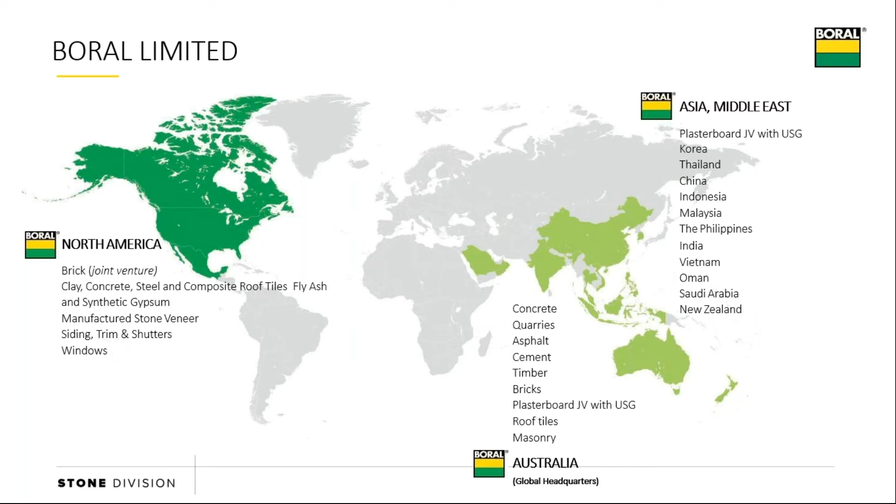By way of introduction, I want to walk through who BORAL is if you're not familiar. BORAL is based in Australia. They do some work in Asia and the Middle East, but in North America, we're primarily a cladding company, doing products like roofing, trim, siding, windows, and obviously brick and stone.

One of the things I've really enjoyed working for BORAL is their stance on sustainability, being responsible in how we manufacture. A lot of our stone plants use closed loop water reclamation systems, some in places that are often in drought situations, so taking little to no water from the local community is a good thing. We've got a brick plant that runs off methane produced from a landfill a mile or two down the road, using that to heat the kiln, reducing the amount of other gases and energy needed to run it. So we're trying to be smart in how we produce the products.

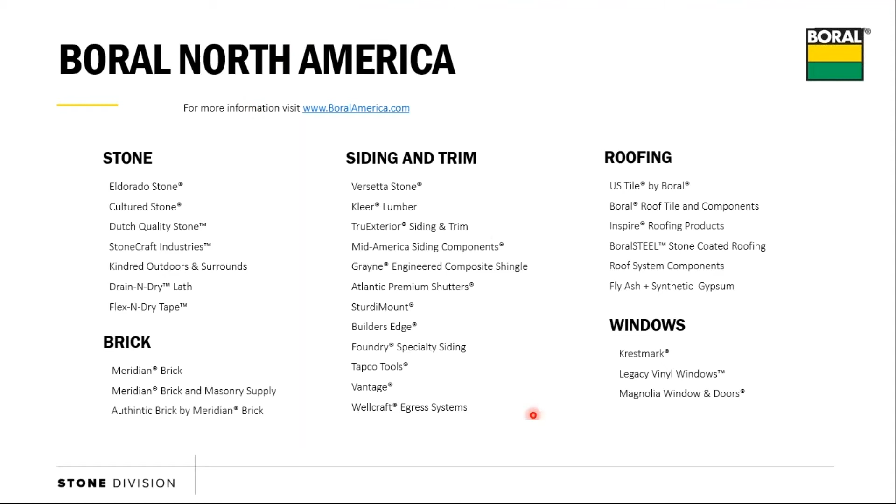BORAL is the leading manufacturer of 5 different stone brands. If you need more information, please follow up with us. Also, a quick list of some of the other siding, roofing, window, and trim products we produce and sell. If you need more information, just go to boralamerica.com and you can find more there.

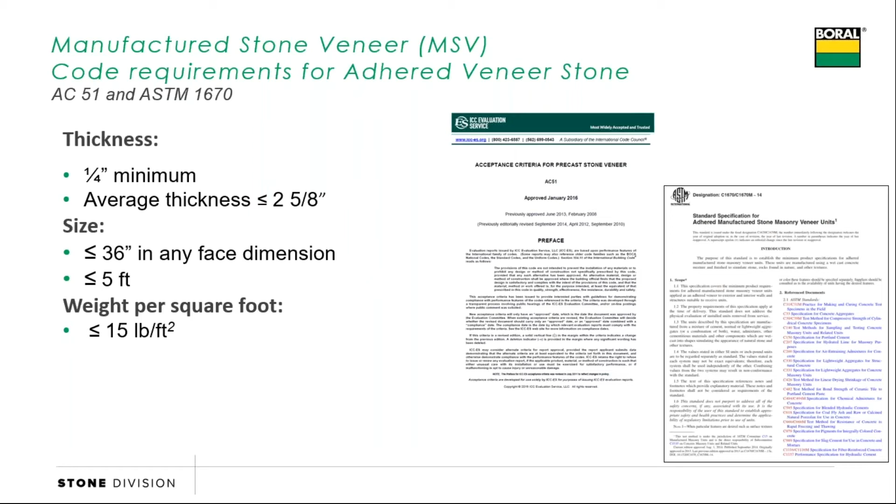As a quick foundation and recap, in our first presentation we spent time talking about the code requirements for the actual units. I think there are 2 we'll focus on again tonight: the average thickness, 2 5/8, and also the weight. The units themselves shouldn't weigh more than 15 pounds per square foot, typically less. Then for the lath and scratch coat setting mortar, we usually add an additional 8 to 10 pounds, so the max would be 25 pounds per square foot for code compliance.

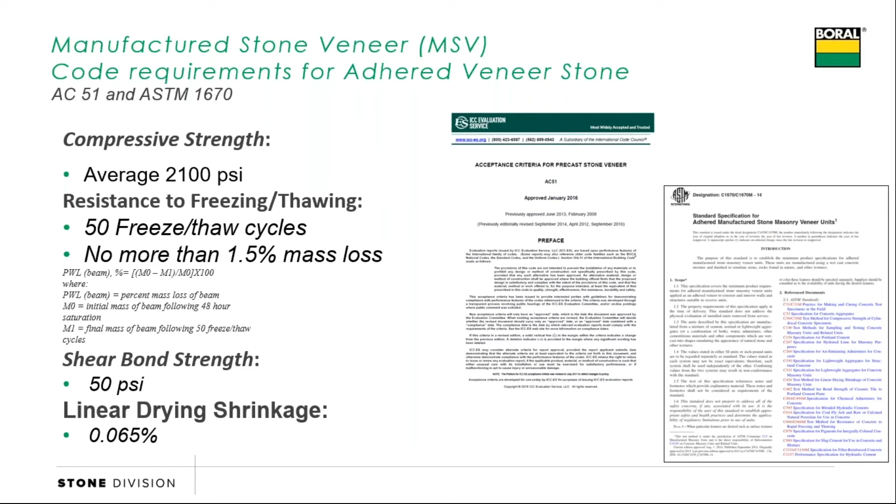There's a lot of testing that should go into any stone that meets those requirements, so again, our recommendation is to make sure you're looking for stones that have done some third-party testing.

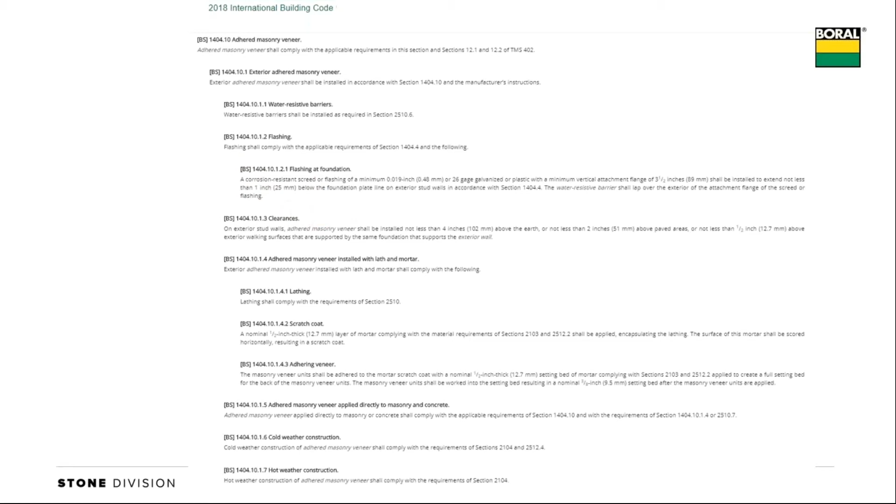We also took a quick look at the building codes and what they say for installation. There's a lot of information about water resistive barriers, flashings, and clearances to grade, and we'll focus tonight more on the flashings and clearances required for an installation. We're going to do most of our work out of the NCMA-MSV installation guide for our stones, using the most current edition that came out in September of 2019.

In our last presentation, we took a few minutes to talk about some of the different ways moisture and vapor move through a wall, whether through HVAC systems, a vent for a fan, or the hot and cold weather we get in summer and winter. It really doesn't matter if you're in the north or the south, energy loss is a concern, and adding insulation to slow that down is part of slowing down leaks in walls. And then obviously, rain events.

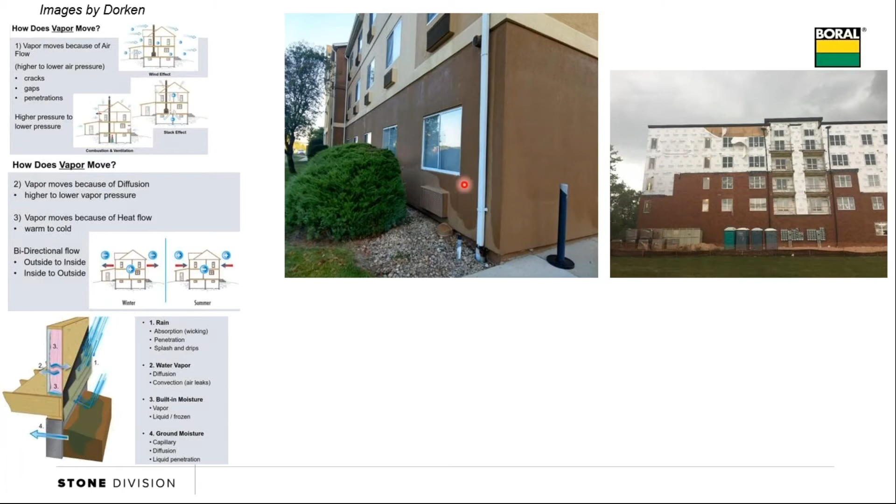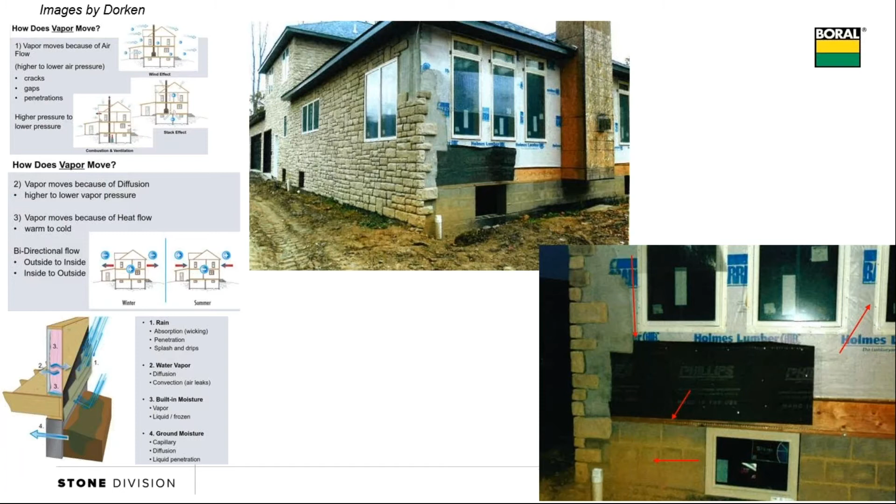We took a look at a picture like this, and again really focused on the area inside the red, where we've got the improper tape on the window. We do have 2 layers of paper, and that's correct, but we did talk about this flashing.

Code requires a piece of flashing between two dissimilar materials or two different types of cladding. The idea is that any water getting behind the cladding above should be directed out over the face of the cladding below, not directed back in behind.

But in the setup we see in this picture, any water traveling down this primary WRB is going to get driven back in behind that black paper. It's not going to jump on top and then jump again to get over that flashing—it's a reverse flashing. They should have either cut the primary WRB to tuck the flashing and paper in, or used a flashing tape on top.

So what does a mistake like that cause? What kind of issues can we see? What we don't see in this picture is about 2 or 3 more stories of stucco or eaves up above.

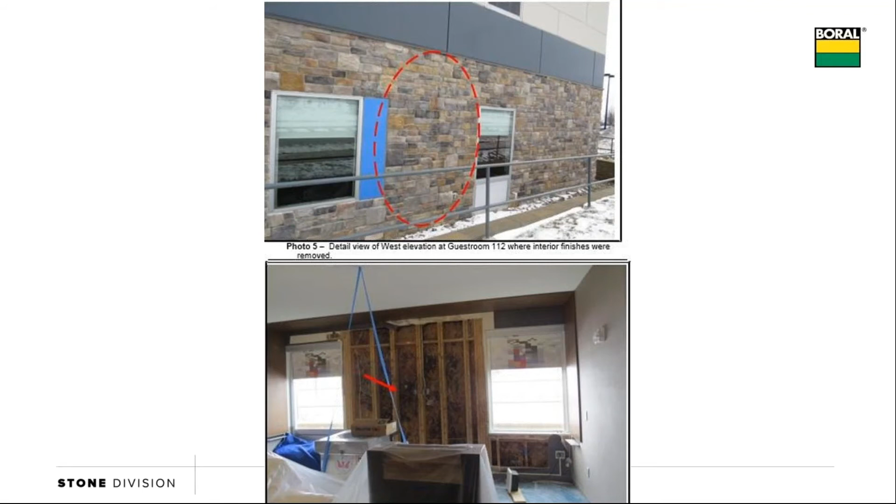In this picture, again, you can't see the 2 or 3 stories up above, but we can see some water sitting in the stone here, and most of it looks pretty dry. That would be an area of concern.

As they began to tear off the stone, they found a lot of damage behind it, and what they found, again, was reverse flashing. The flashing was on top of the paper, directing water from the 2 or 3 floors above back in behind the stone rather than dumping it out.

So how do we prevent against some of these issues? What are some things we should be looking for? What are some of the details we're going to use? That's what we want to cover tonight.

The first thing we would recommend is to require a mock panel. It really doesn't matter if it's a residential or commercial job. If you've got a residential project with maybe a new design or new contractors, it's not a bad idea to get them out around the house and work through the sequencing.

On a commercial job, it's not uncommon to have some type of mock panel, but having one this extensive is important—with windows, penetrations, and all the transitions between dissimilar materials. It gives us a chance to make sure the right products are used in the right places, and to talk through contractor sequencing: who goes first to put the flashing in, who comes in second, so everybody knows what to look for.

We can check for proper flashing placement and talk about those material transitions—is there going to be a soft joint between that brick and stone? It also helps us handle any aesthetic disagreements.

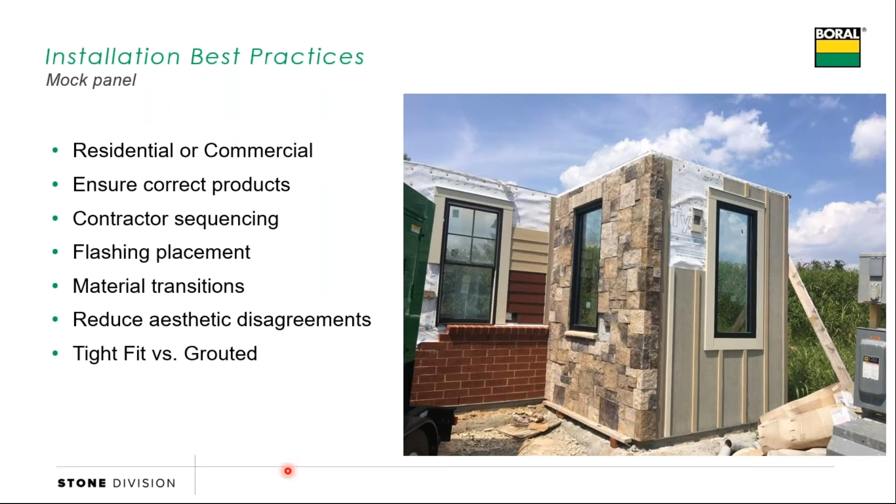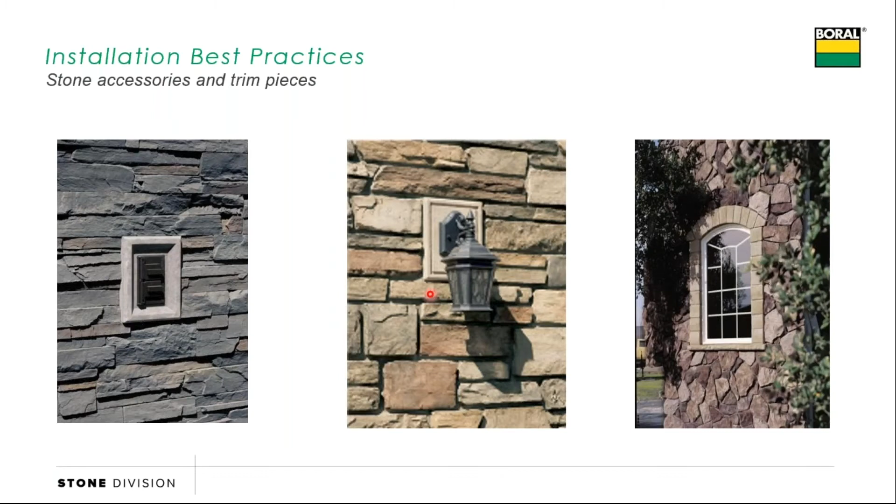Finally, make sure everybody's happy with their tight-fit look or grouted install, depending on what they've selected. If there are penetrations coming through the wall, it's a great opportunity to show what those trim pieces will look like, and also a chance to talk about mortar colors.

These are popular—if you've got a lighter colored stone and want a lighter mortar, it's good for the owner, architect, and designer to see what that colored mortar looks like and make sure they like it before it goes on the completed project. It's a lot harder to change once it's on a finished job.

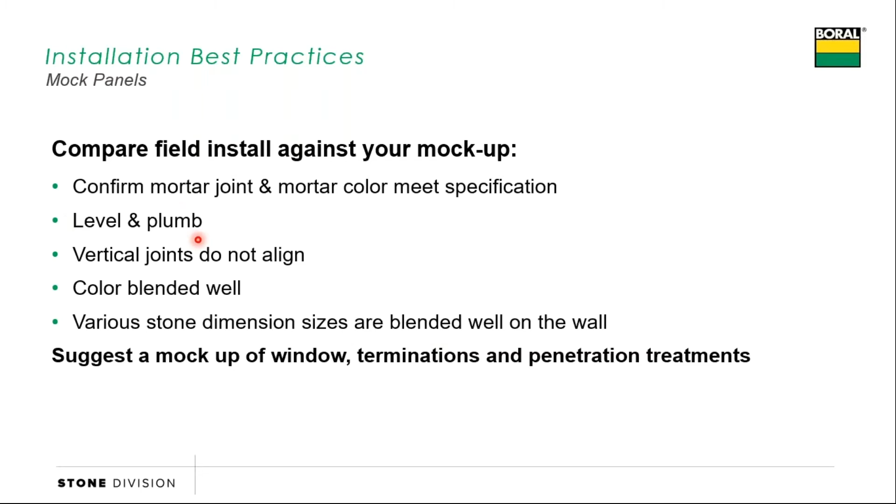It's a good chance to check the level and plumb of the install and make sure we're blending colors well. This is a nice smaller mock panel, but it's got all the different claddings and all our different transitions on here.

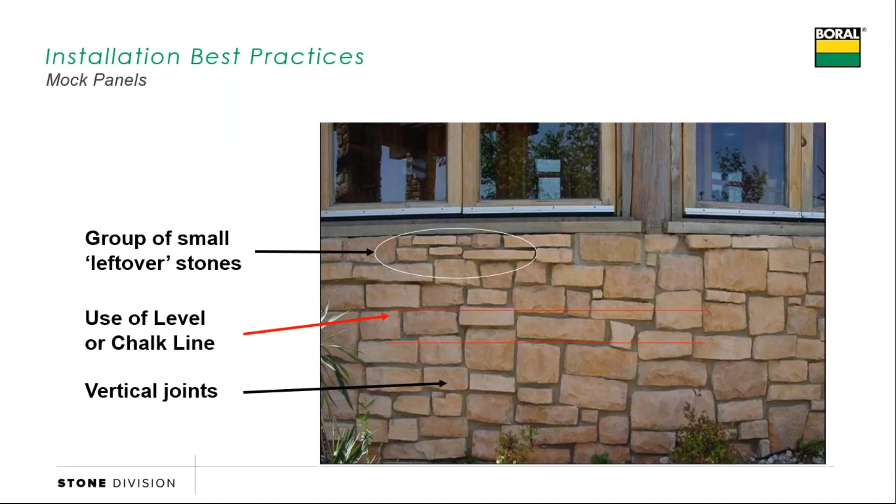If we've agreed that this is what our stone install should look like—and I know this is a different profile, but it proves the point—if we end up on an actual job site and see all the little stones got used up in one spot, we've got really long head joints, and we didn't chalk lines because we can see how we're tailing off and running downhill. If this was our mock panel, the control we used for the installation, and this is what went up on the job, I don't think we'd have nearly the arguments we have today. So it's important to have those mock panels.

The other thing a mock panel gives us a chance to do is some testing on it, making sure we've got flashings in the right place. In this case, we're going to look at this transition between the stone and the stucco.

If all we do is install our second layer of paper where the stone's going to go, put our metal lath on, put our stone on, in about 6 weeks, maybe 6 months, right in between the stone and the stucco, they're going to move at different rates. And that's going to open up a crack, typically big enough for water to run into. They call that bulk water intrusion.

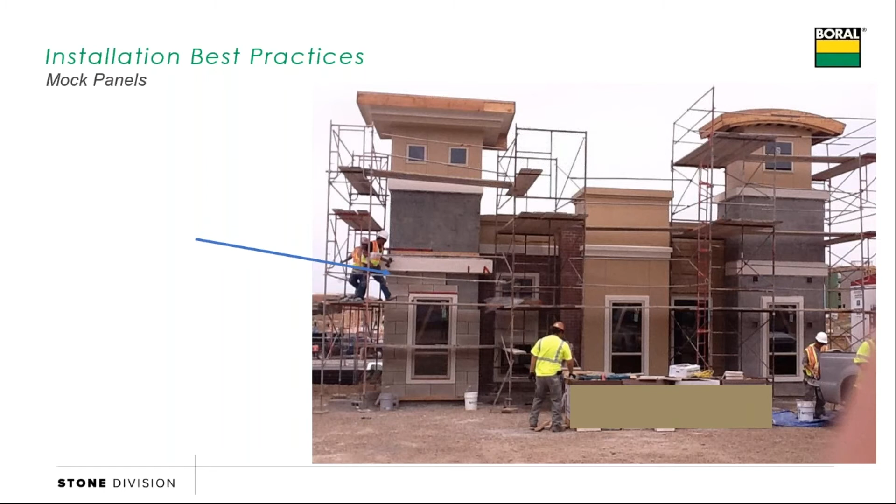Now, if water hits the middle of a stone system, typically it soaks into the stone and the scratch coat, and any that makes it through the paper will travel down and exit out. But if we've got a hairline crack big enough for bulk water to get into, that's where we see wall systems that get oversaturated, and over time water begins to work on the sheathing and cause damage there. So there should be flashing in between those two per code.

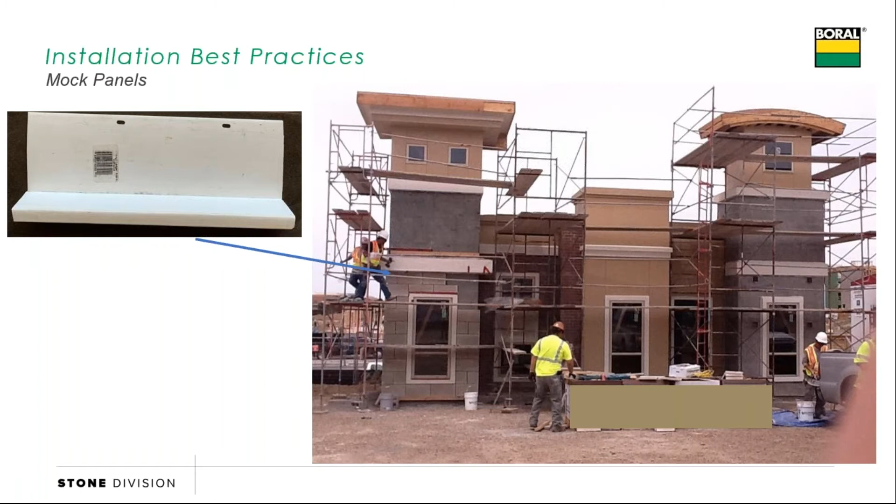If we've done a proper mock panel, we would know who was responsible for that flashing piece—is it the stonemason, is it the stucco contractor? And when the other trade shows up to do their work, if they don't see that flashing there, they can notify the GC, the designer, or the owner and get it corrected before they install. That way we don't have those issues in the future.

Now, in that NCMA guide, there are quite a few different details, over 40 of them. We'd recommend getting a copy of that guide. We're not going to go through all 40 right now—just some of the more popular ones, the ones we get the most questions on. But these are available both in PDF and CAD format.

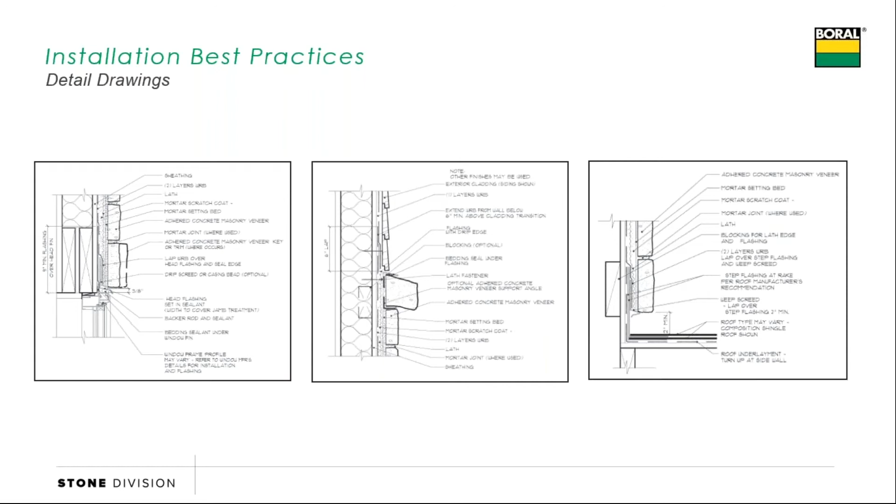Probably the most common question we get is clearance to grade. What we're seeing here is our 2 layers of paper and our metal lath and scratch coat, all terminating on top of a weep screed. That weep screed is going to be about an inch, at least an inch below the sill plate. It serves 2 purposes: it's a drainage spot for our stone system, and it's also that capillary break to keep water from wicking up into the bottom of the wall system.

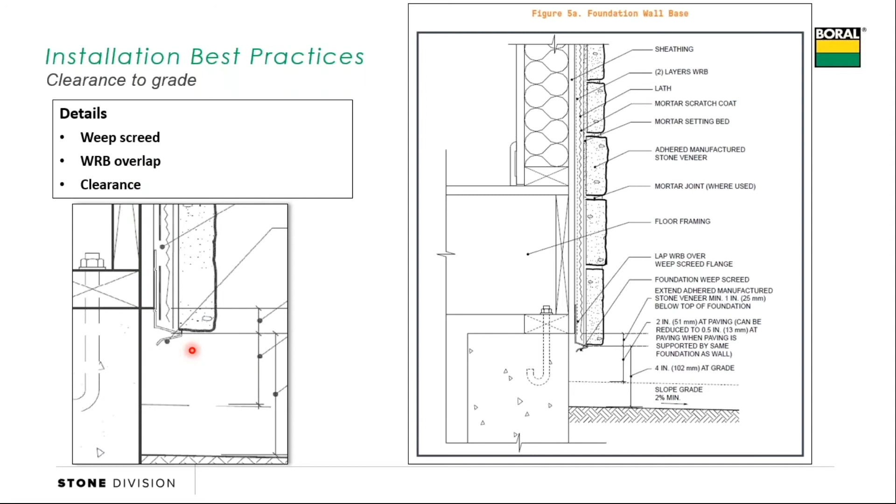That clearance allows for termite inspections and keeps water from wicking up. Code says we need to be 4 inches away from grade, 2 inches from a paved surface, and ½ an inch if that paved surface is part of the foundation that the wall is on. Think of a porch—if that's part of the foundation, it's really not going to move at all because it's part of the foundation the home or structure is on.

The reason we look for that is it's a trade-off. We're using a lightweight concrete that wicks water, so we don't want it to come in contact with grade—we want that open exit point for water. If we put it in constant contact with grade, we've got potential for efflorescence and staining. That gap gives us a place for termite inspection, and to be honest, it's a requirement in most areas for code. Manufactured stone is not different from other cladding products.

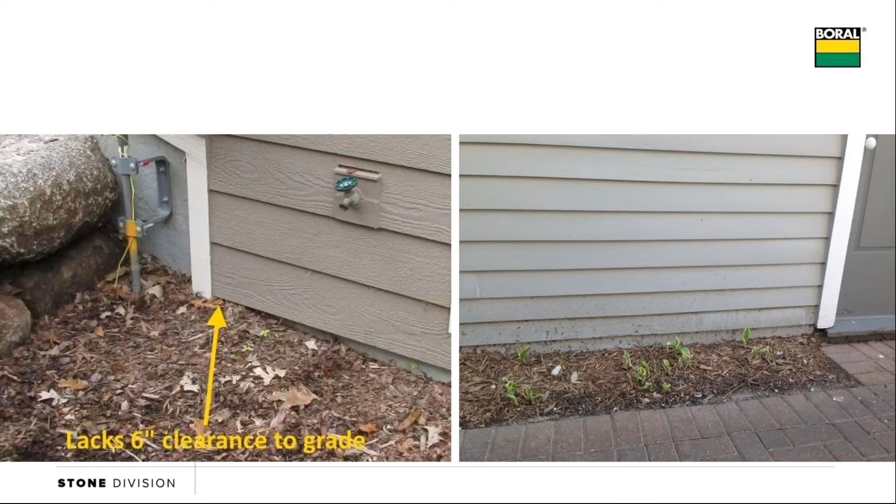If you look at wood siding, vinyl siding, cement board siding, they have clearance requirements also. And if you look close enough at this wood siding, you can see it's beginning to soak up water and it's beginning to damage the stone or the wood siding there. Brick is an amazing, beautiful, and hard product, but if exposed to enough de-icing salts, that can begin to cause damage even in the brick and the grout joints that are there.

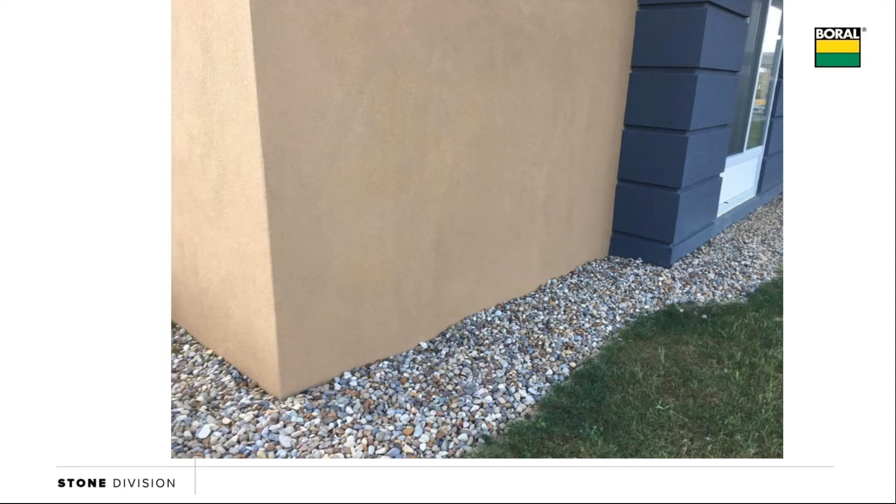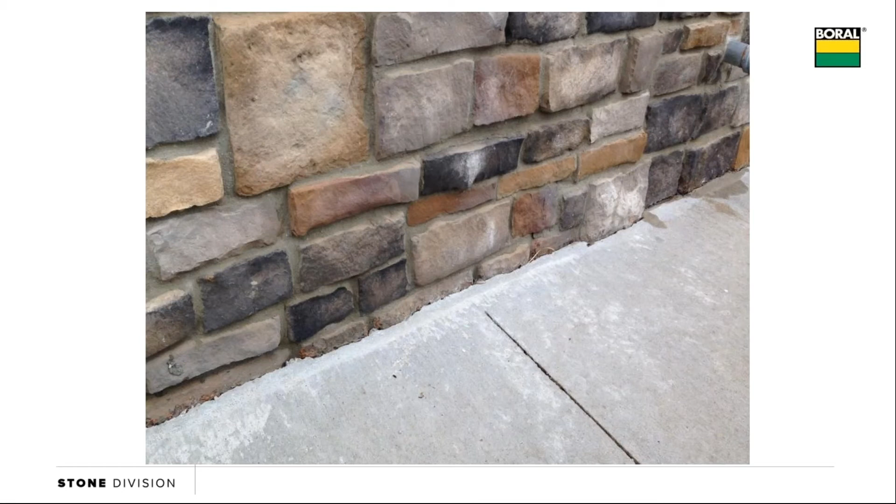This is an EIFS system. EIFS should have a 6-inch clearance at least, and it was buried down into grade. Now, as that system tries to drain, it can't, and that can cause some damage. And then obviously with a sidewalk that's poured right onto a manufactured stone, as it heaves a little bit, it's causing damage.

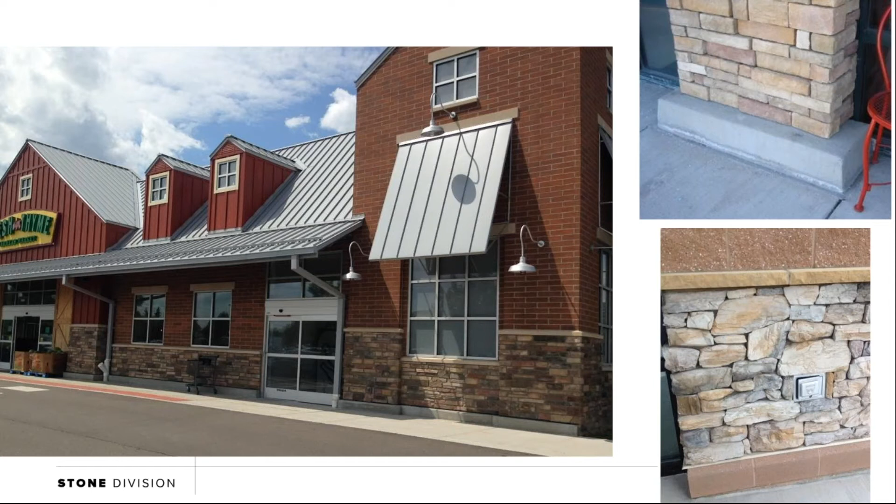So some different ways that we have seen that folks are trying to handle that clearance. In some commercial jobs, they're pouring or adding bumpers that are part of the foundation. That way by code, they're allowed to come down to within 1/2 an inch, and now it looks like that stone is actually sitting or supported rather than floating up above a sidewalk. An application like this could work in a commercial or a residential application.

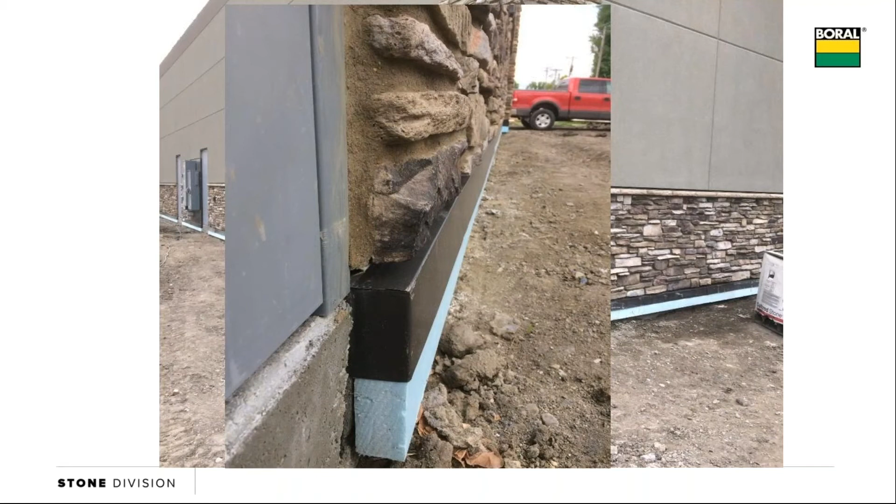They've bent a coil stock that might either be similar to the stone or maybe to the mulch out over top of a piece of 2-inch rigid foam, but it's tucked back in behind the 2 layers of WRB and weep screed so that any water that travels down gets out and doesn't get driven back in behind. They do that the whole way across the stone system. Now, when they come in to backfill, they still need to stay down that 4 inches to meet the requirement for code. But now that stone looks like it's supported, it's a much cleaner, much nicer finish.

Now, anytime we transition from foundation to framing, code says that we need to handle this transition somehow. We've got 2 different options. The first one is to bring our 2 layers of paper, our metal lath, terminate them on top of some flashing. And then from here on down below, we can either apply directly to clean masonry, or we can shoot lath on if it's not clean, to get a better bondable surface.

And now we can come down to within 2 inches to grade, this pop-up, 2 inches to grade, and 1/2 inch to a paved surface, as long as we've handled the fact that that paved surface is not going to heave substantially and cause damage. But what we're seeing in this detail is this flashing piece that needs to have a 3.5 inch attachment flange, has a sloped bend to it, a bead of sealant underneath. This is required. If we follow the lines from the weep screed up, you see that the weep screed or a drip screed or a casing bead would be optional.

The reason is we have created a drainage point for the system with this flashing, and we've created the capillary break. That weep screed is kind of redundant. It's doing the same thing, but it's now dumping the water out over the face of the stone. It would dump the water right on the stone below it, which is not good. So we have to have the flashing. The casing bead would be optional.

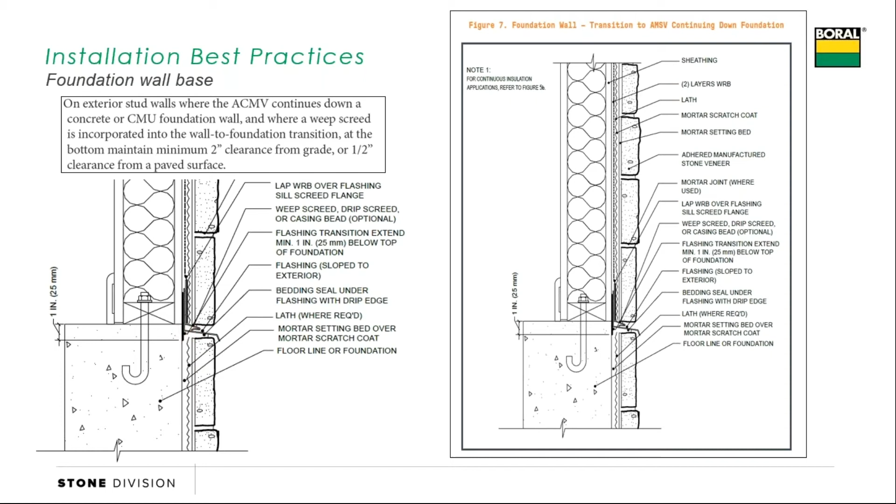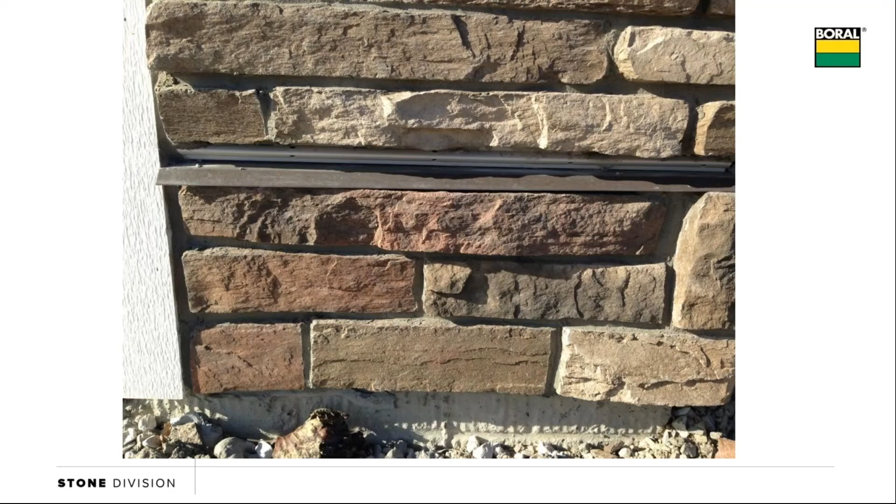It would look a little like this. You could remove that casing bead that's there, or I'm sorry, the weep screed that's there. You could bring that stone down a little bit further, and if you can get that metal to kind of be a similar color to the stone, it's not that noticeable. And again, we can come down within 2 inches to grade now, or 1/2 inch to that paved surface.

If you don't want to see that running across at the sill plate, our other option is to put some flashing at our transition point between the foundation and the wood, and then carry our 2 layers of paper and our metal lath down to the weep screed, but it needs to stay 4 inches from grade, 2 inches from a paved surface, because we don't want water wicking its way up and having any chance to get to our framing.

Now, in both of the details, I didn't highlight it in the first one, I should have, but in the second one, we can see this flashing before the 2 layers of paper. The reason we see that on there is this is a very fairly vulnerable point in the construction. If we only bring our weep screed an inch or so below this sill plate and have our paper on top of it, water could wick up and get back in behind here fairly easily.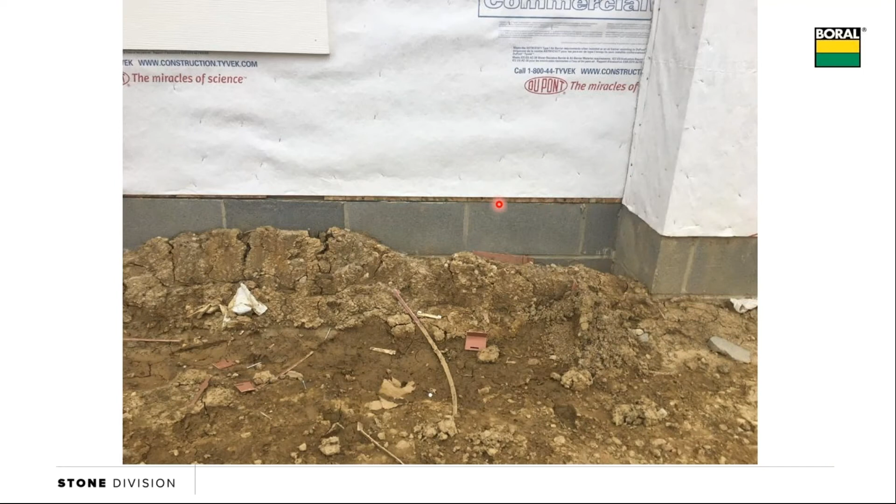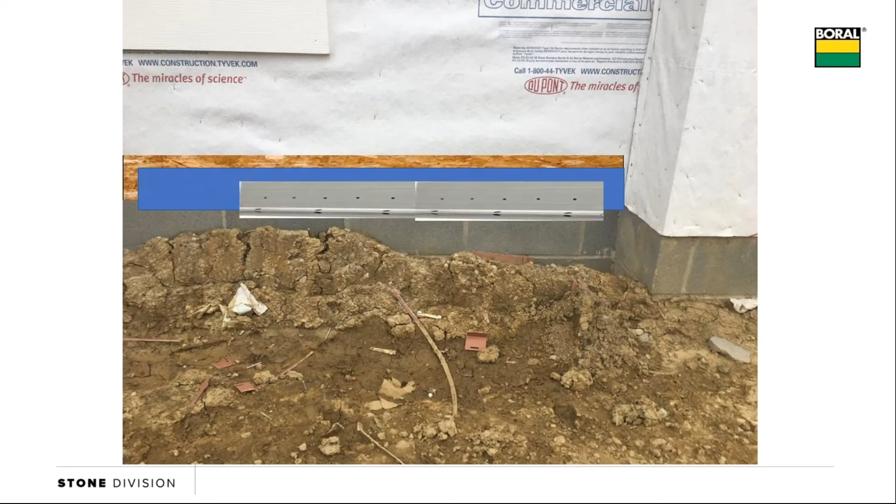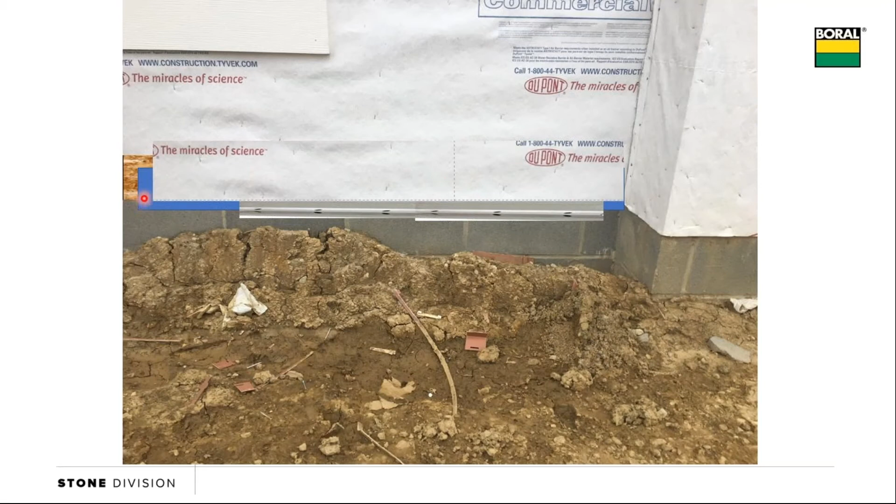So what we're seeing in that detail is that primary WRB gets flipped back up. We're going to come in to expose the wood there, come in with some flashing, some metal or some peel and stick there. Next, we would install our weep screed and then bring our primary WRB back down over top of it, and then our secondary layer and our metal lath. That way we know that this transition point is properly protected.

Stone coming up in a wainscot application, or stone coming up to a first floor, and then transitioning to a different cladding, often using a water table sill as that transition point. This is a pretty common application.

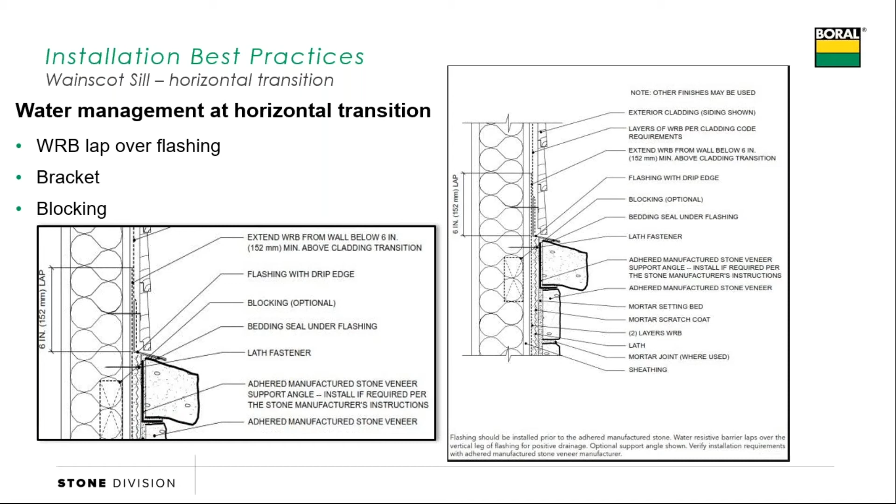Now we recommend 2 anchors per water table sill. You would need to put blocking back in behind in order to anchor those properly. If that blocking is not present, then you're only going to be able to anchor those into framing, which means they may only get 1 of those anchors per water table sill.

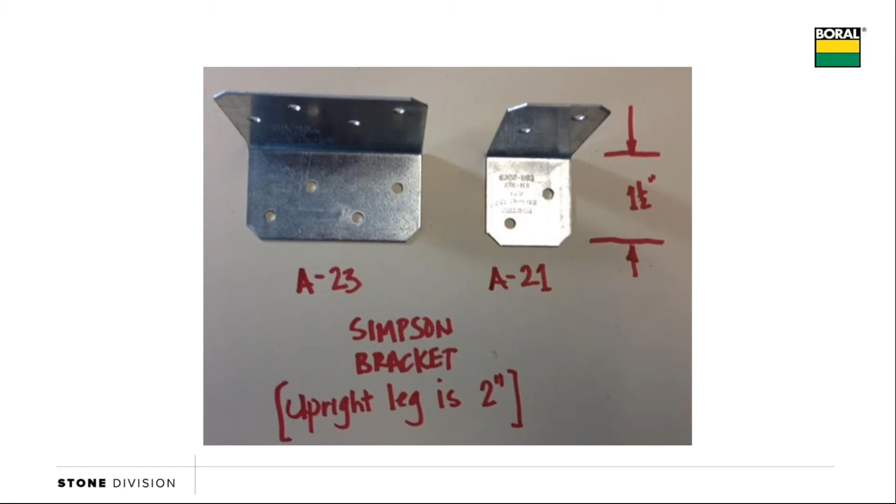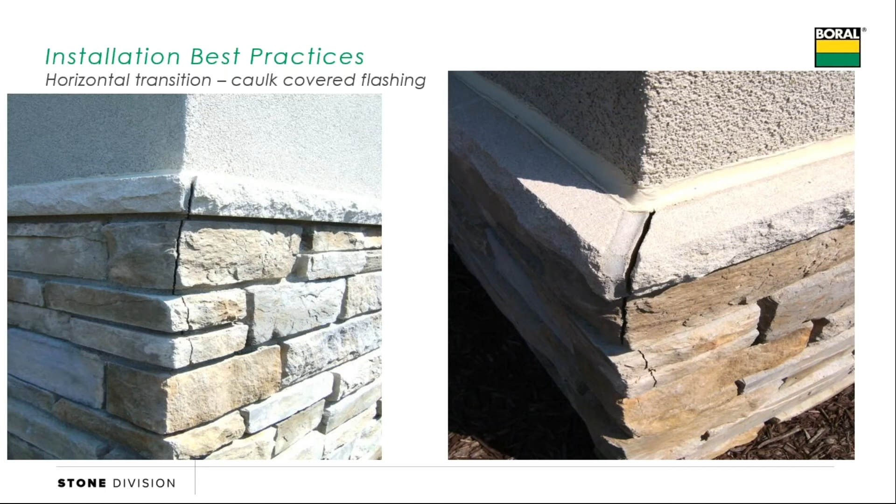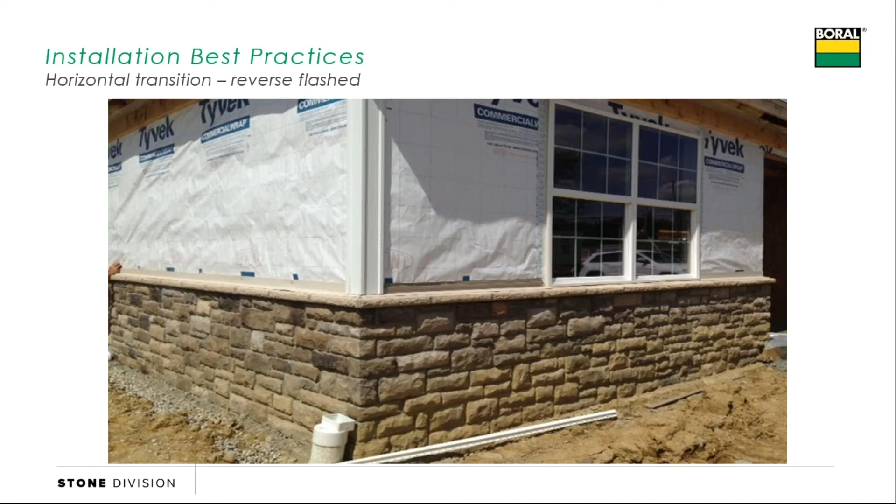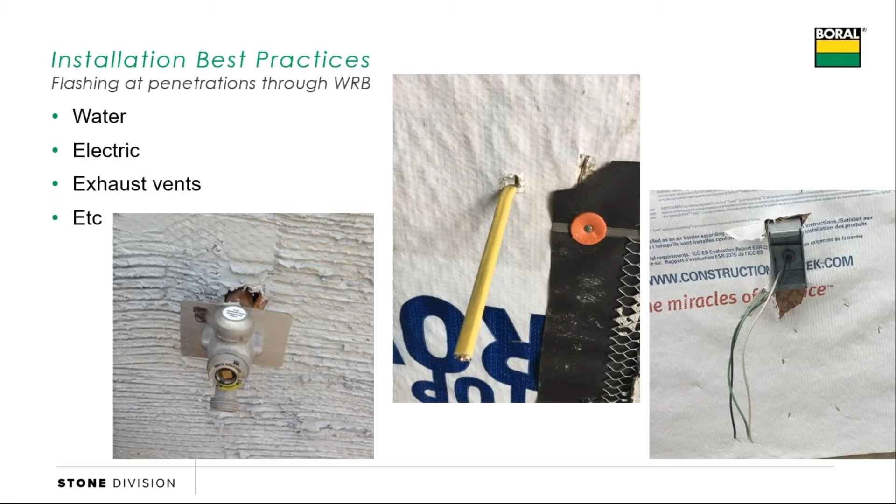Let's talk about penetrations that are coming through the wall, whether it's for a gas line, a dryer vent, or electric, as you see in here. We need to make sure that those have been properly handled. We want them to be air and water tight. There are a lot of great details in our installation guide. I would also suggest that whoever the primary WRB manufacturer is, they likely will have some really great details on how to handle those penetrations coming through the wall.

But I would suggest that holes like these coming through our primary WRBs, if not addressed, are more dangerous today than they were 20, 30 years ago. If all we do is poke a hole in our black paper and stick that through the electric, and then cut our metal lath out around the outside and install our stone over top of it, we've created a spot where moisture and bugs could potentially get into that wall.

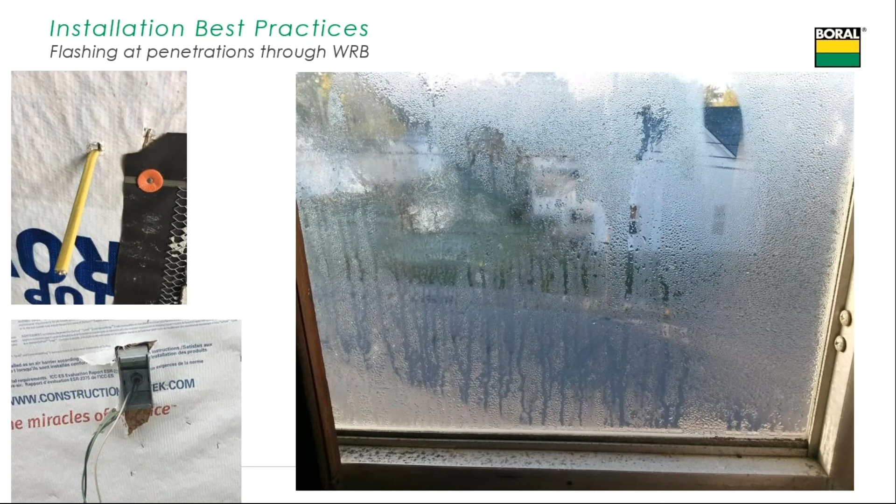I would suggest that that is not how we're building homes today. We are sealing up as many holes as possible. Often homes and buildings are performing blower door tests to make sure that they meet a requirement. If they're finding leaks, they're going through and sealing those up.

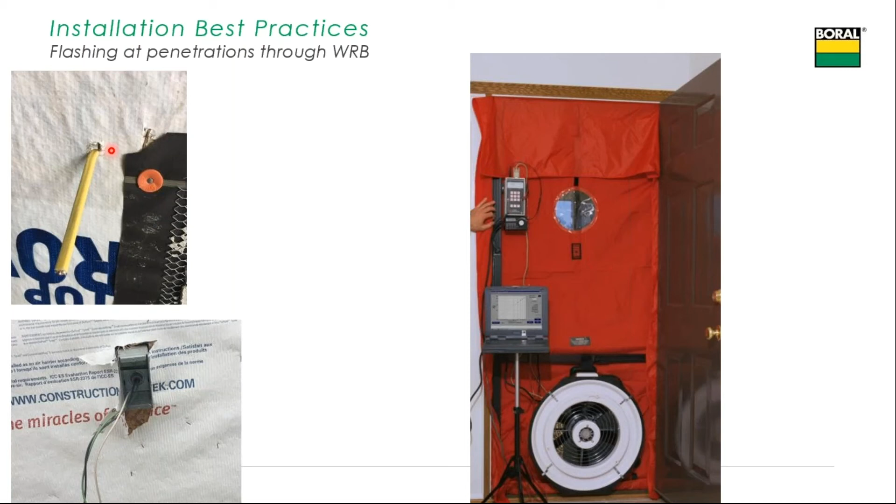In a home like that, a hole that has not been handled properly becomes a place where water can get in. The folks over at Construction Instruction have a wonderful app with some great videos, and I took a screenshot of one because it tells the story better than I can, where some warm, moist air finds its way into a wall cavity through something as small as an electric socket. If it warms up that wall cavity enough and finds an exit point that has not been sealed and flashed properly, we begin to see condensation.

That cold, dry air meets that warm, moist air. And if water is dripping right underneath this electric line over 3 years, 5 years, 7 years, maybe less, eventually that's going to begin to rot out that wall cavity.

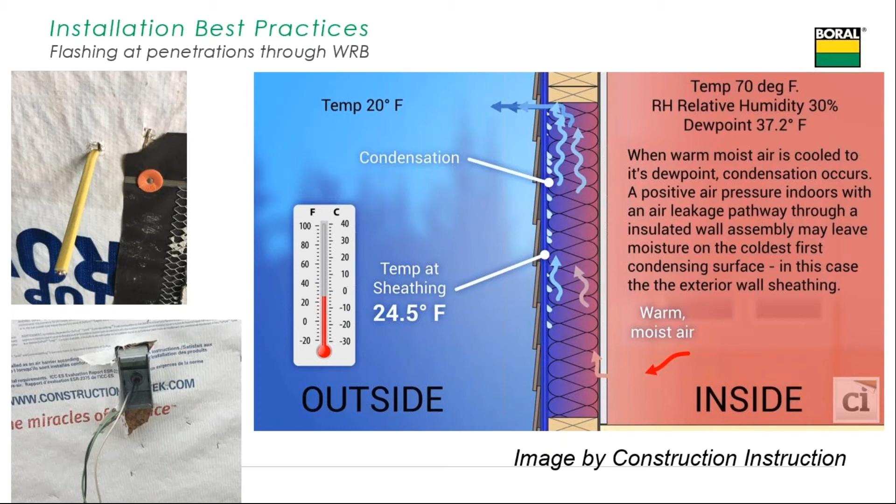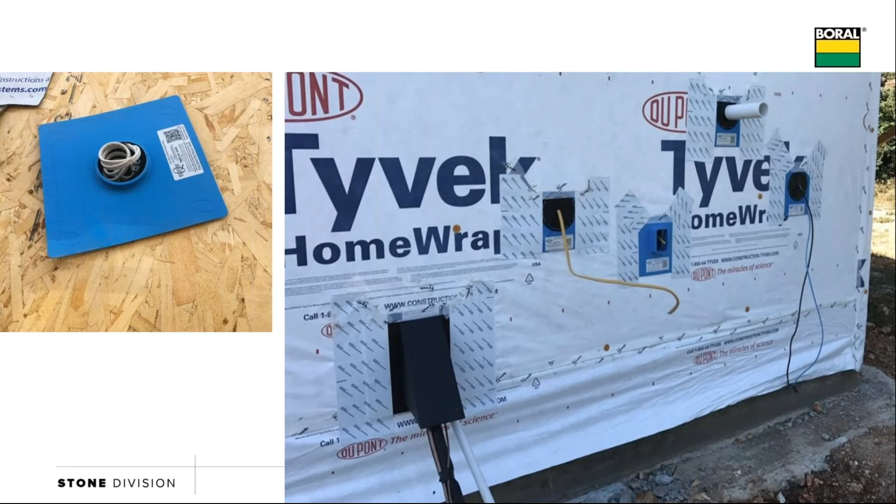So it's important that when we approach a project, all those penetrations have been handled properly. I would suggest to the contractors, if you do not see those penetrations handled properly, if it's your job, you need to fix them. If it's not your job, you need to go get somebody and have them fix it before you install over it. You do not want to accept a wall that is not properly prepared.

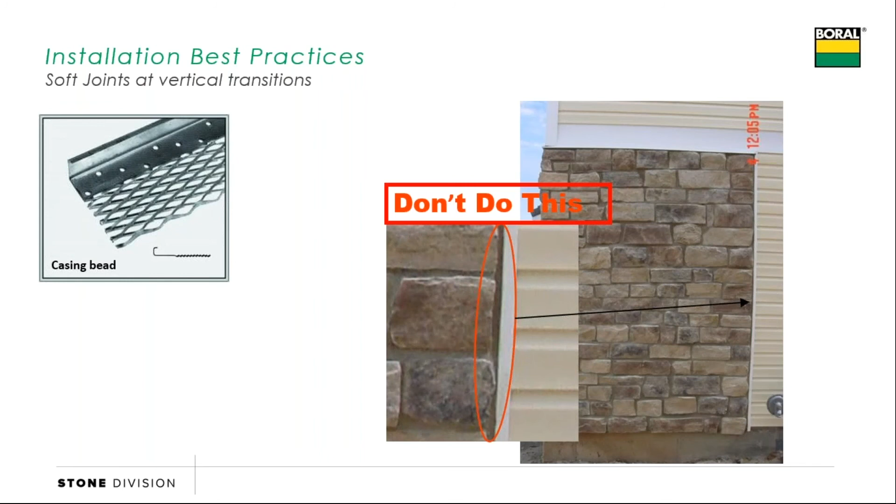Let's talk about soft joints a little bit. Chris covered this a few weeks ago. If you didn't hear it, go back and grab that one. It's worth the listen.

But anytime we transition between dissimilar materials, we talked about the flashing that's required for those horizontal transitions. But the same thing goes, we need to handle these vertical transitions properly. That J channel is going to expand and contract at a much higher rate than stone and grout does. Same thing goes if that were brick or cement board or vinyl siding or wood siding. They move at different rates.

So what we need to do is have a soft joint in between to protect water from getting in. Again, if that J channel expands and contracts a lot, we're going to get a crack probably big enough to slide your credit card through for bulk water to begin to penetrate into that wall system. And if it works sideways, it can begin to cause some damage.

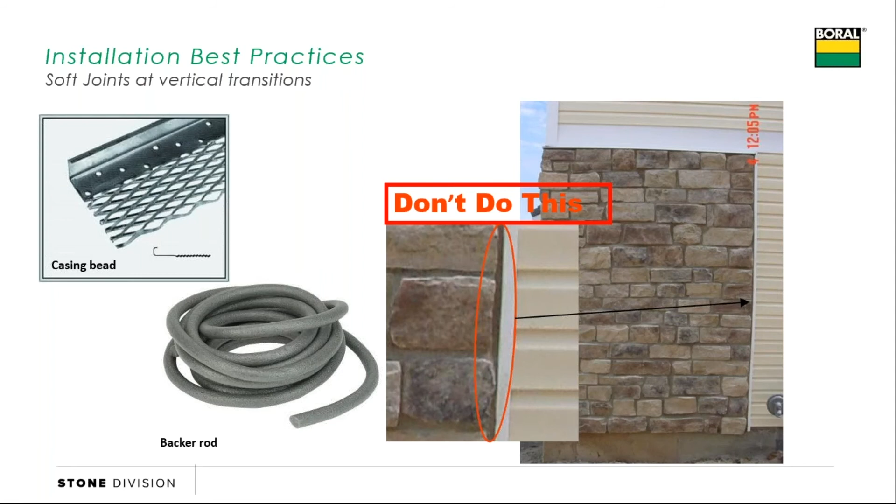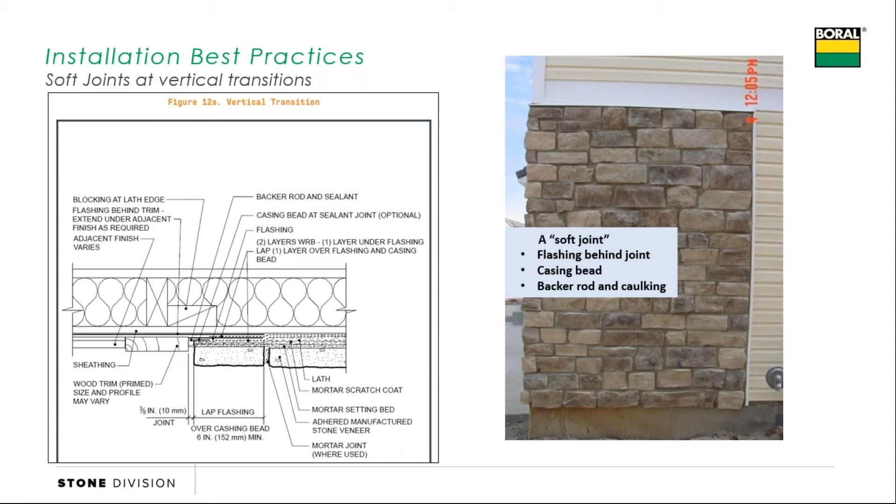So what should that soft joint look like? Well, typically it's about a 3/8 gap, and then it's typically filled with some type of backer rod and sealant. That allows those two dissimilar materials to expand and contract at different rates without damaging each other, and also prevents that bulk water intrusion. Here's a picture of a soft joint in between two dissimilar materials.

That's great to see, but you can see that stuff begins to pick up some dirt and just isn't really a good match for those materials. We do have a product called Flex and Dry tape. This would be a soft joint replacement. The nice thing is you don't need any caulk anymore. It installs faster and will last longer than the sealant that you're using.

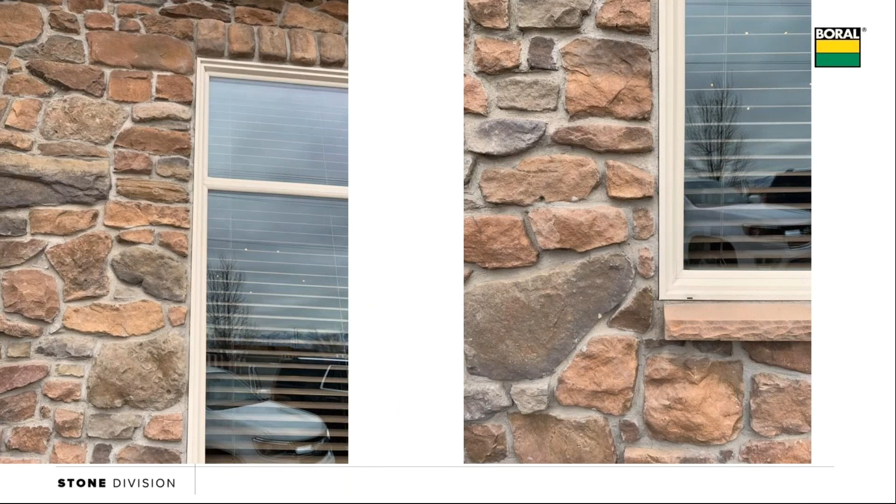Another place that we should be concerned with that differential movement is between windows and stone. If you look close enough, you can see the hairline crack. It's worked its way around all four sides of this window. This is a new building. No one has taken occupancy yet, and we're already seeing those cracks begin to open up.

What's happening is that window is expanding and contracting. The grout and the stone are not. Unfortunately, with windows, when they expand and contract, and if they try to expand out and can't because they're hitting brick, stone, siding, something like that, they begin to cause damage, and a lot of times that moves internal. It might be windows that don't open well, or worse yet, the seals that are inside of a window that are meant to catch water and direct them back out can crack and allow water to begin to penetrate inside of that wall system below the window.

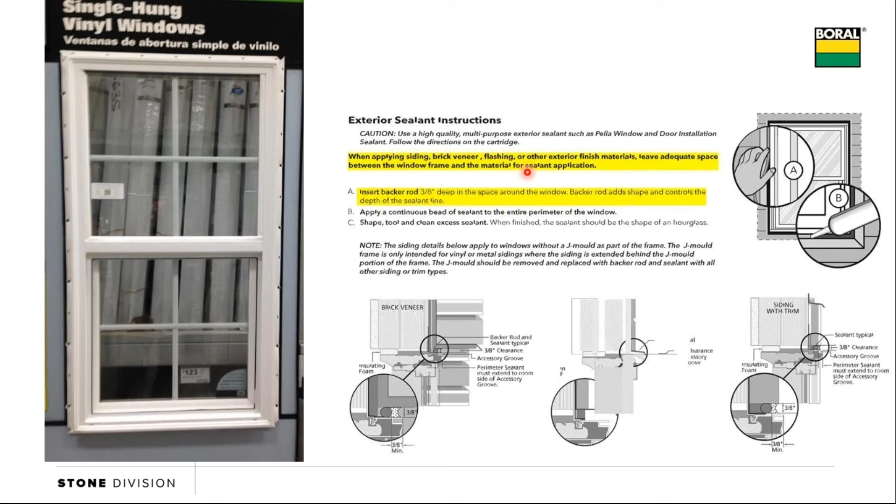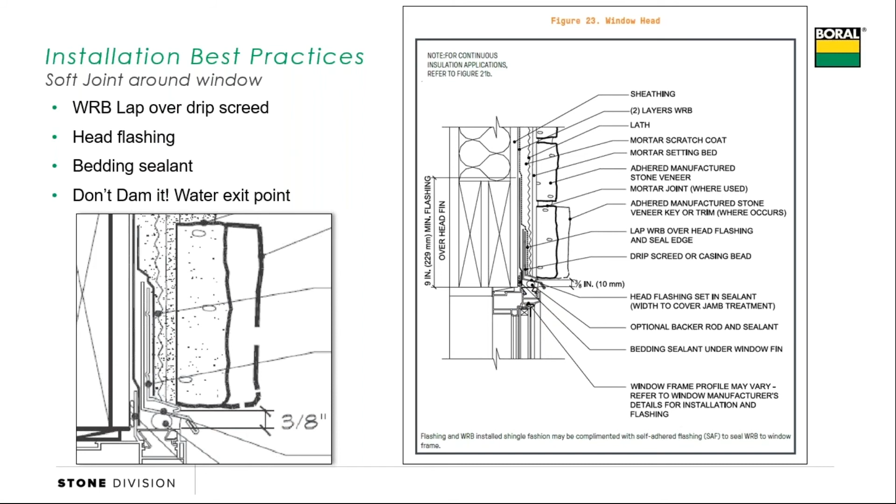If you take a look through most window manufacturer installation instructions, they're going to ask for that soft joint between siding or brick to have flashing back in behind, all of that to protect that window. So what is that going to look like for stone? Well, we want to see a soft joint underneath a piece of head flashing, and then our paper and lath over top. We want to take any water that is traveling down that wall above the window and direct it out over the face so that it's not dropping on top of the window. We need that 3/8 gap around the sides.

And the same thing goes for underneath. Now, what it's going to look like with a stone job is something similar to these pictures. We've got our gap that we can come back through and fill with backer rod and sealant.

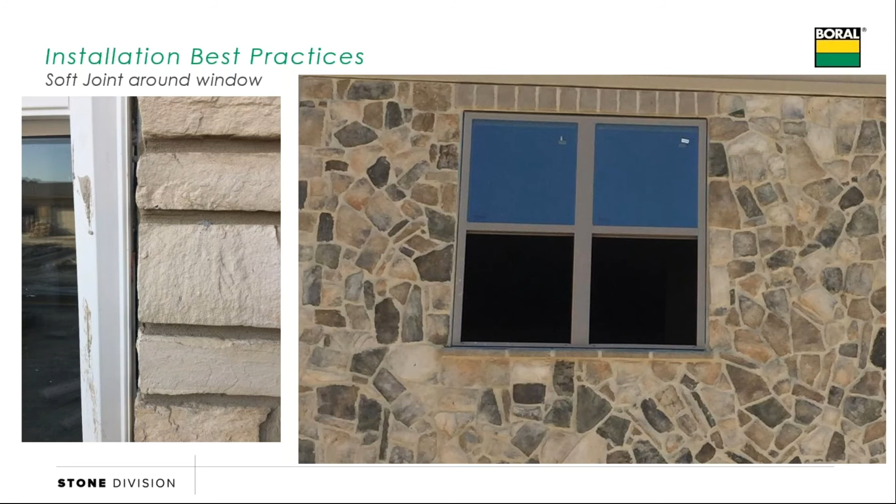I would suggest that probably from the sidewalk in, to be honest, you will see the gap in between those two. As you get back from the sidewalk out to the street, it really becomes very hard to see. But the important thing is that by creating that soft joint on all four sides of that window, we've now given that window the opportunity to live its lifespan.

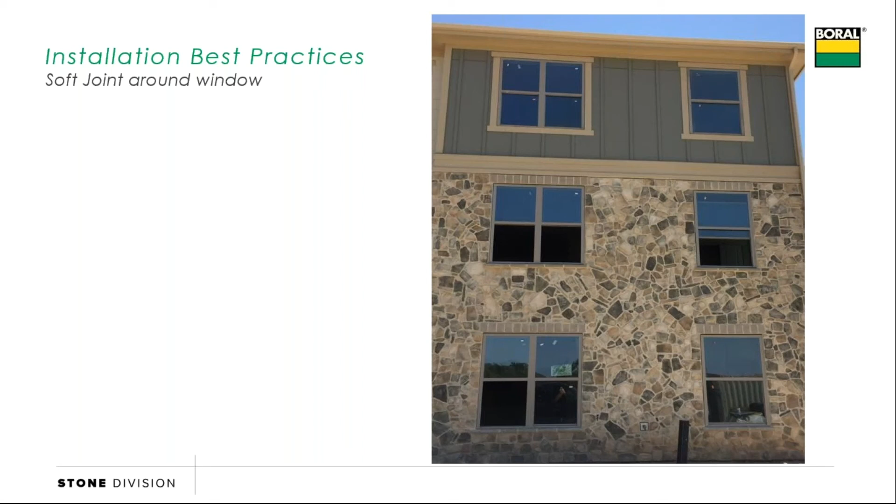If it's supposed to be a 20 or a 30 or a 50-year window, it's got a better chance of living that long. If we install our masonry right up tight against that window, there's a better chance for that window to fail early, and for window manufacturers not to cover that warranty because of that masonry bind.

And again, we think that Flex-N-Dry Tape would be a great solution for around those windows. It creates a better blend with grout, or a better shadow with the black, than most sealants do. It keeps your windows looking very crisp and clean.

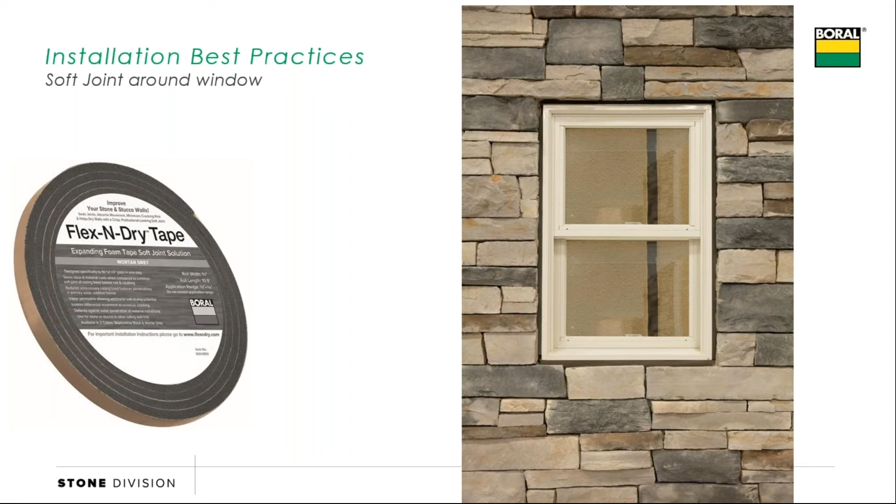Let's take a look at roof lines. In this situation, we've got stone installed down on top of the roof line, and we've got a roof going up this way, and a gutter, all pushing water down this corner.

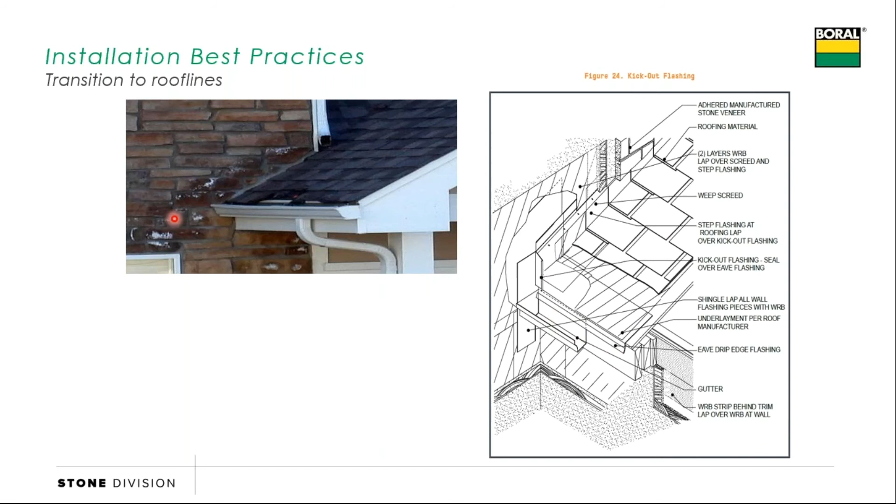We can see it shooting over towards that window. I hope that window is prepared properly because it's getting saturated pretty often. What we should see is a piece of kick-out flashing that directs water back into the gutter. Right now, there's no kick-out flashing, so water can shoot over. If we had kick-out flashing there, it would direct it back into that gutter.

What would that kick-out flashing look like? Well, it's a three-sided piece that tucks back in underneath the step flashing. And now as water travels down, it can help to channel that water back into the gutter.

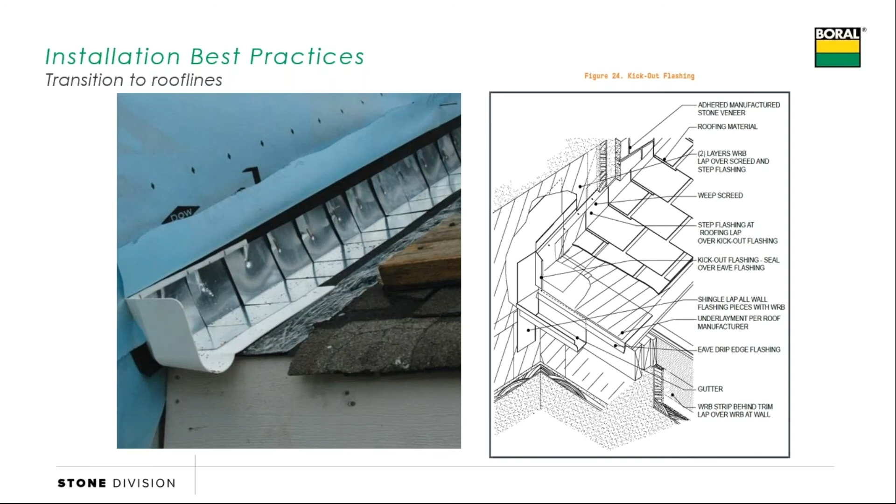Now, in this project that we see here, we can see some water trailing over. And they were also getting water inside dripping from the window. So as we climbed up on a ladder, we were able to see what looked like kick-out flashing. And if you remember, kick-out flashing is three-sided.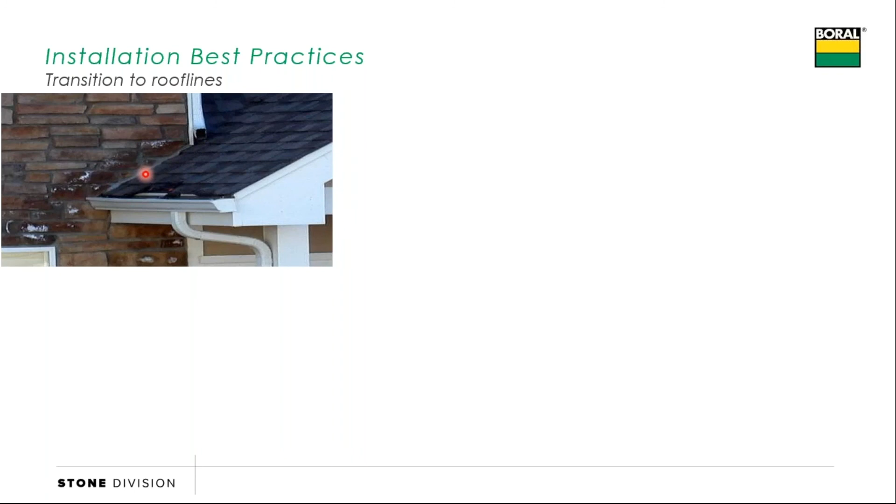The other problem we've got right now is that stone is installed down onto the shingles. So every time those shingles get wet, they're going to start pulling water, wicking water up onto that wall. And if we've installed stone down onto shingles, that typically means we've brought our metal lath right down onto those shingles also, which means our last row of nails or staples are going directly through that step flashing, and as they wick water up, we're potentially holding moisture against those holes in that step flashing.

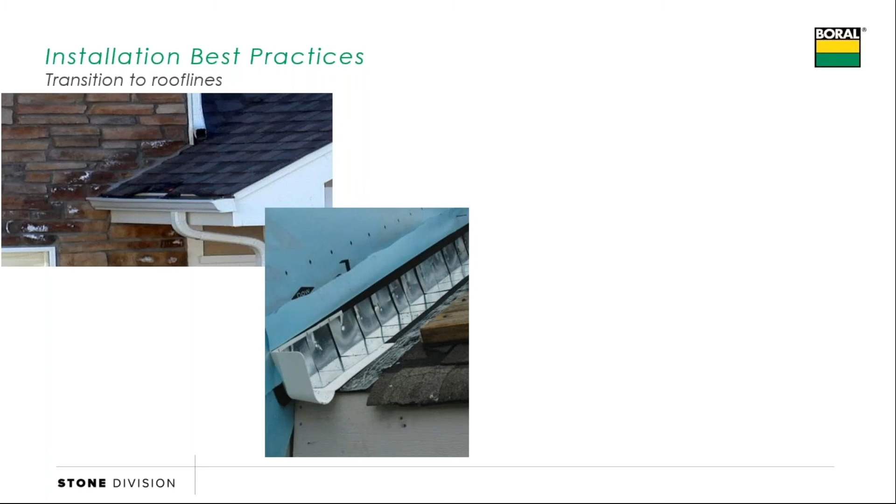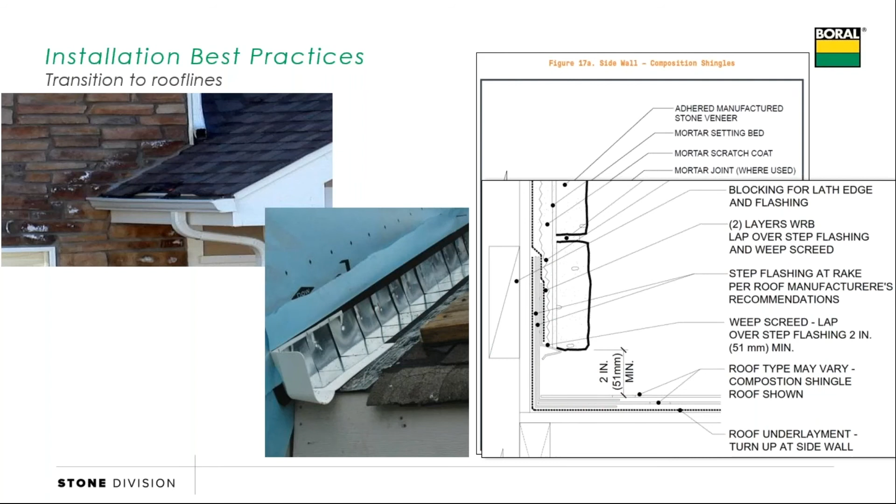So how do we avoid this? Well, one of the ways would be to hold the stone up about 2 inches off of grade - I'm sorry, off of the shingles. That way we can put our last row of nails hopefully above or near the very top of that step flashing, and we're keeping it away from coming in direct contact with that water on the shingles, so it should not be wicking water up.

It doesn't have to look that bad. You can see the siding and the stone have been held up properly off the shingles in this situation, and from the ground, I think that's a pretty acceptable look.

The other option, if you don't want to see that 2 inches of clearance, would be to put in a filler or a curb. They're showing a 1 inch board here, but I think you could almost go 2 inches. That way, as you bring your step flashing up and your counter flashing out over top, and now as that stone runs up that roof line and you're looking from the ground, that stone almost looks like it's supported by that curbing piece rather than floating up above these shingles.

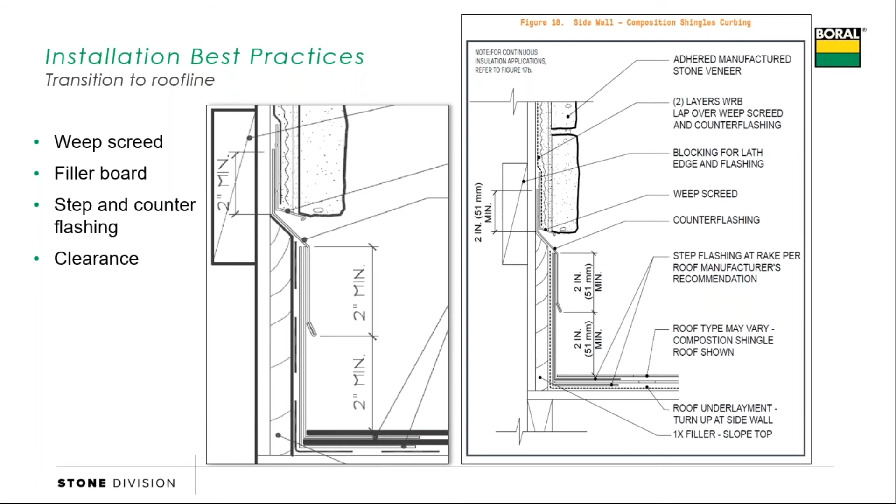Anytime we've got a retaining wall, we want to make sure that we've got some really good waterproofing on the back and drainage. If we don't, water begins to work its way through the CMU. It carries salts and different chemicals and begins to cause some damage and efflorescence to the stone. If you don't have the opportunity to put really good flashing and waterproofing on the back, the other option would be to put a rain screen on the outside. That way the water's got a chance to get into that rain screen and channel its way out rather than drying out through the stone.

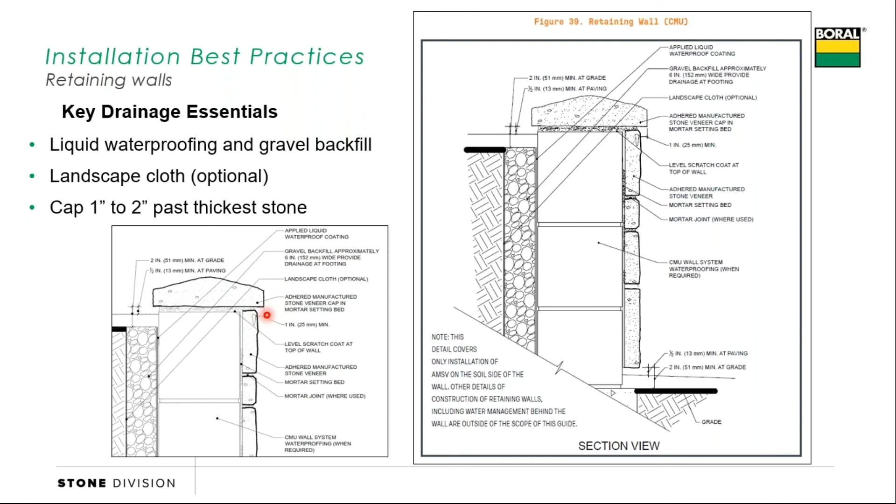Another thing we like to highlight is the cap. Making sure that we've got at least 1 inch of overhang. 2 inches would be much better. And if the cap that you're using doesn't have a kerf, field cutting that in or some type of a drip edge would be important so that any water traveling down that cap doesn't run back in. Make sure that it drops out before it gets to the stone.

Now, anytime we're installing over top of masonry that may be used for an entryway sign, some pillars or columns or knee walls, if there isn't a living space on the other side, you can bring the clearance down to 2 inches to grade and 1/2 inch to a paved surface.

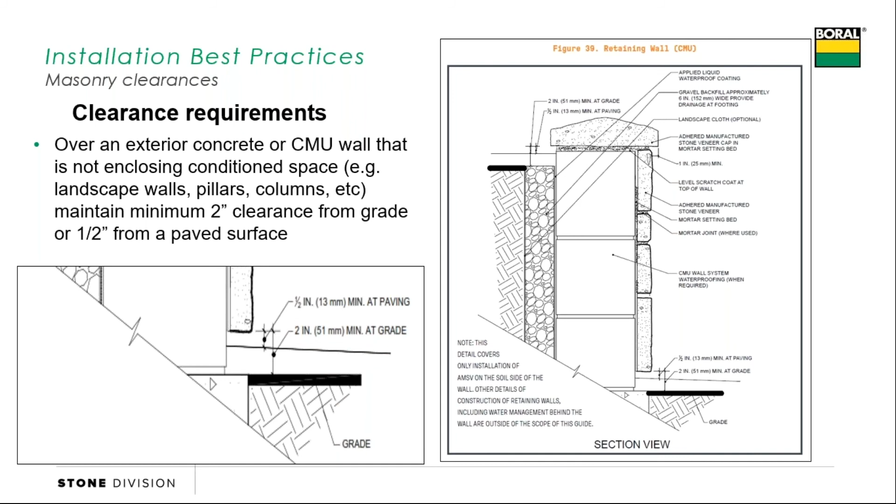Let's take a look at wood columns on porches. This is often what we see where the stone is installed right down onto the porch. So we've got two problems. One, down here at the bottom, eventually water is going to begin to work its way in between the porch and that bottom stone, and it could eventually begin to get to the wood of the framing and cause some damage. So one solution would be to put flashing with a bed of sealant underneath it.

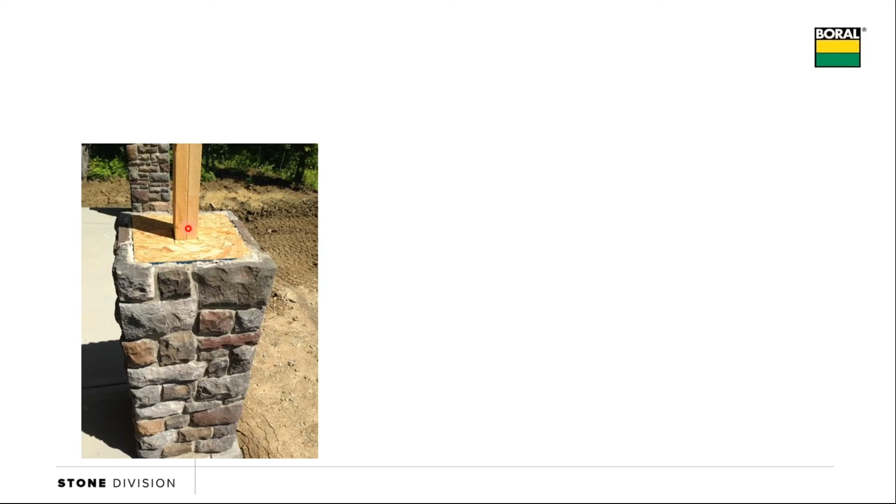I think the bigger problem that we often see is in situations like this where we get 2 layers of paper around the outside. Maybe we even overwrap it with metal lath a little bit. But when we come in and put a cap on here, any sky-facing joint, whether they're grout or caulk or anything like that, will eventually begin to leak. If you look at this cap here, and just off here to the bottom corner, you can see that they haven't even put in finished grade yet, and we're already seeing a hairline crack opening up in this cap. Now if water makes its way down in and there's no flashing or anything on top, water will begin to work on that wood, and it doesn't take long for it to cause some damage.

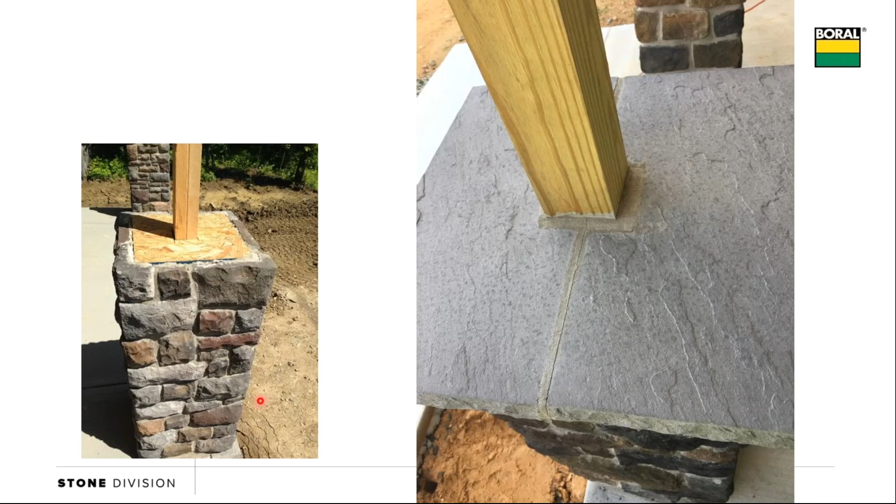So what we're suggesting is once you've got your 2 layers of paper around the outside, bring some flashing up across the top and then back down. Now, if you've got a post coming through, you may need to use some peel and stick on that to run from the post down onto that flashing. The detail looks a little bit like this: we've got our 2 layers of paper around the outside, then flashing up the side, across the top, and then back down, and then our metal lath, scratch coat, and then our stone.

What it looks like when we don't protect those sky-facing joints, when we allow moisture to get in through the top, it only takes probably about 6 months to a year to develop some hairline cracks from that wood getting wet and expanding and pushing through the metal lath, even if that metal lath and stuff are installed properly. It only takes about 3 years for it to completely deteriorate the inside of that column.

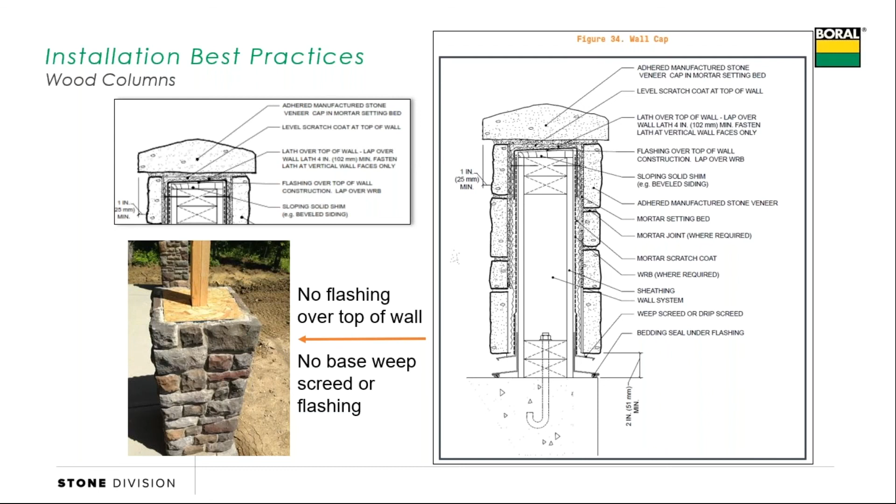And so one recommendation might be, rather than framing this out of wood, once you have your posts in here, have your contractor lay out of CMU the column. Now you want some airspace—you don't want that post to be able to twist and come into contact with your CMU and nudge it. So leave an airspace, and still want to do some flashing on top to keep water out. But if water does happen to make its way in, we don't have that concern with rotting wood on the inside.

Our last topic tonight is going to be around continuous insulation.

Increasing energy codes starting around 2012 began to require larger quantities of insulation in buildings, especially in regions 3, 4, 5, 6, and 7. But even in regions 1 and 2, we're seeing more insulation being used for the same reason we do up north. We spend a lot of money to keep our buildings warm or cold on the inside, and we don't want to lose that energy and money as easily.

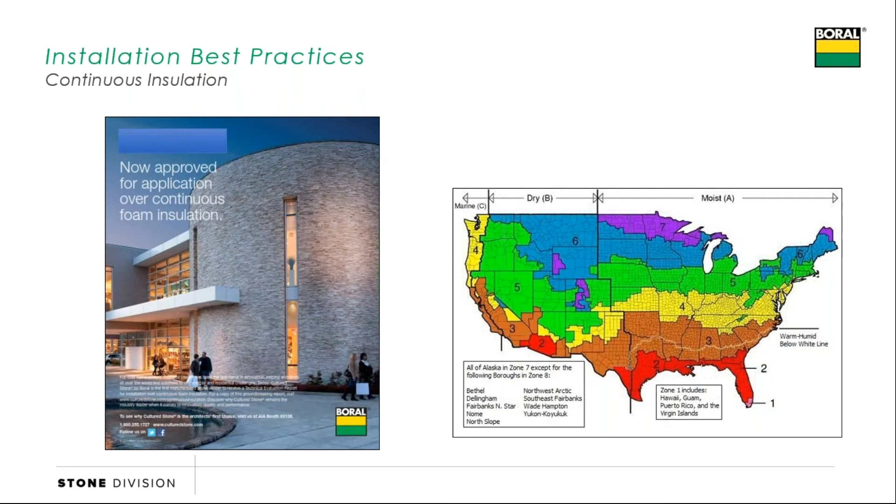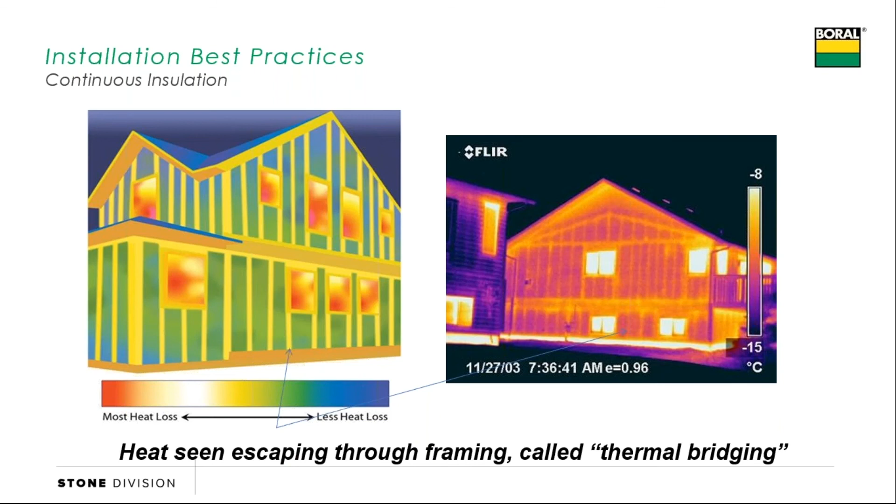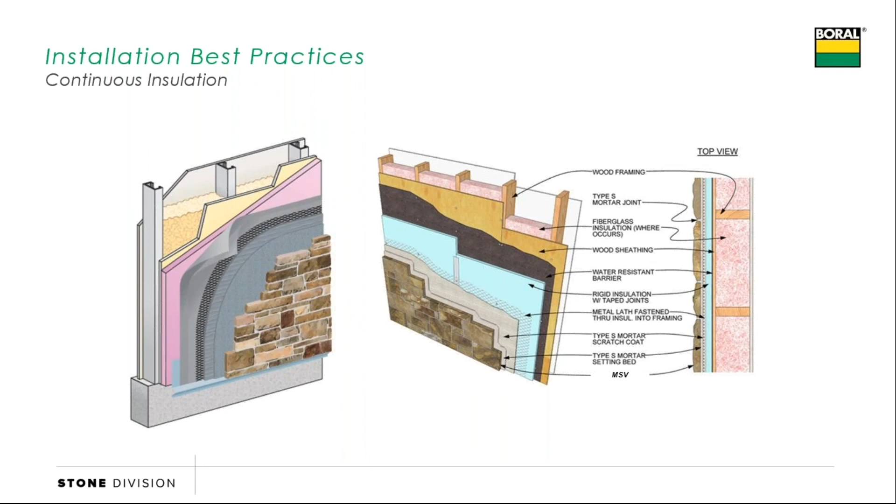We can see where the insulation is in between these studs, but those studs, because they're not insulated, were responsible for energy loss. So the idea was, let's move that insulation outside of the framing, preventing that thermal bridging. That created some challenges for heavy claddings or even semi-heavy claddings like manufactured stone. So what BORAL did is we went to work with an engineering firm to figure out how we could install our stone over top of continuous insulation.

Now this report is available on our website. You could also get it through your BORAL rep. What it's going to walk you through is wood framing, steel framing, different gauges of steel framing, and then masonry, whether it's poured or whether it's CMU.

What this allows us to do is find out how much insulation they're putting in. The way we measure it is from the back of the stud, or the face of the stud, to the back of the anchor. In between there, we'll probably have a 1/2 inch of wood sheathing, or if it's steel framing, we may have a 1/2 inch of exterior gypsum.

Let's say we've got 2 inches of continuous insulation, and then let's say we decided to use a rain screen that was maybe 3/8 thick, like drain and dry. At that point, we've got about 3 inches between the face of the stud and the back of the anchor—1/2 inch for the sheathing, 2 inches of foam, and another 3/8 or 1/2 inch for the rain screen. So if we look at our table here, we've got a lighter 20 gauge stud.

If we walk over here, we find 3 inches is our space. It tells us how long our anchor needs to be. But if we've got one of our heavier stone systems that weighs 22 pounds, we're not able to do that. But if we bump up to a heavier gauge steel, and find that 3 inches of insulation, we're able to do it. We just need to put that anchor every 4 inches. And then we can find out what type of anchor we need to use.

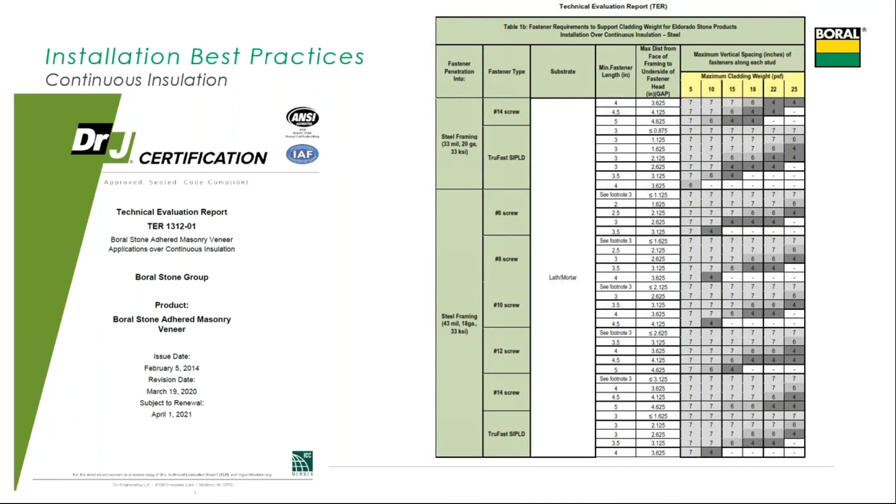There are a lot of other systems out there to install stone over top of continuous insulation. You can use those, just make sure that you check for their testing, make sure they're requiring the proper type of manufactured stone, and that they've got some type of warranty to back that up. But if you get into a situation where they just want to use anchors to try to minimize that thermal bridging, this report would be a great option for that.

So again, as a recap, we really recommend going out to any one of our stone sites, go to the installation instructions and grab a copy of the MVMA's installation guide. This is where you'll find about 10 to 12 pages of information—paragraphs on papers, lath, wall preparation. And then you're going to find those 40 plus details, available in PDF or CAD format.

So with that, I'll conclude our presentation. If you have any questions, we'll take those now.